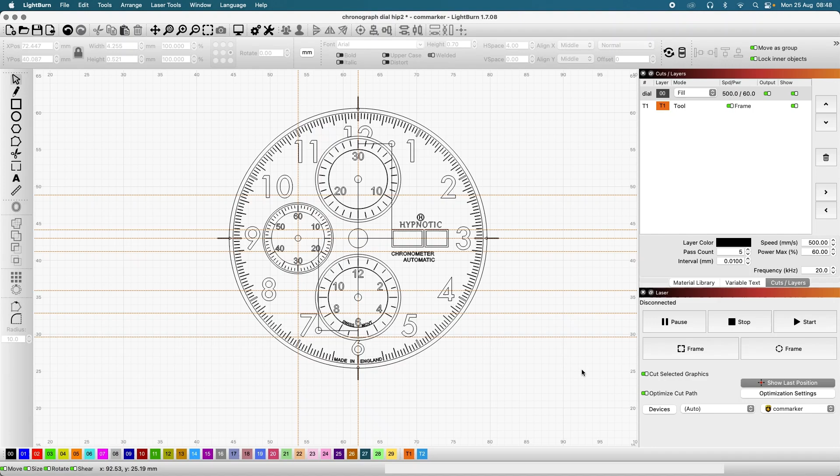Hello everyone and welcome back for part 2 of how you can make your own dial, your own chronograph dial. So in today's video I will show you how you can make your own design using LightBurn. There are many reasons why I'm using LightBurn, to be honest. I will explain to you why I'm using LightBurn exactly and why I'm not using Photoshop.

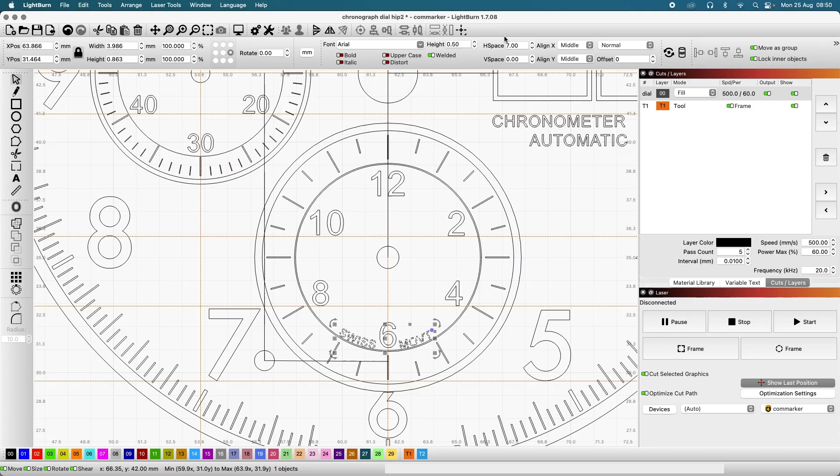So the thing with LightBurn, why I'm using this instead of Photoshop, is that first of all, everything that I'm doing, I can actually check on the piece of metal to see if everything is okay, if everything is in order. That's one. And second, I have more control of the writing. For example, I can see the size of the writing, the clarity of the writing, I can see everything. Another thing to keep in mind is, for example, you see the space in between them, you see everything.

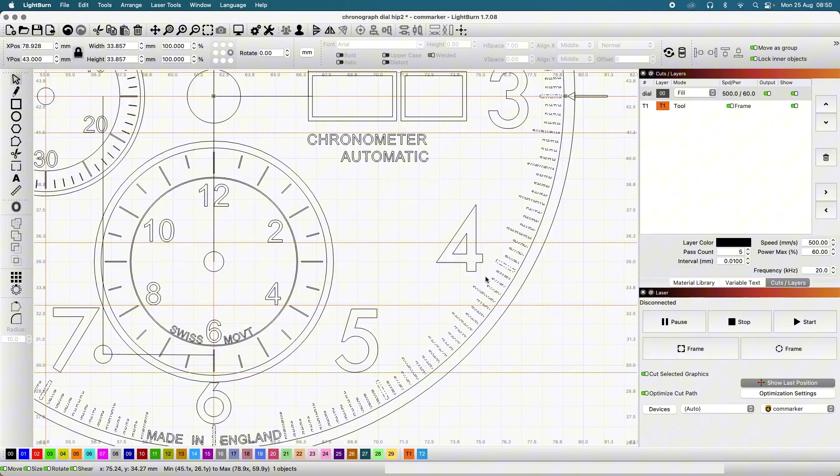So, for example, if you take a design from Photoshop, you do not know exactly the thickness of this cliche. You don't know exactly how big it will be, you don't know exactly if it will work and stuff like that. So that's one reason, and it is an important reason. Again, you can use anything that you want. It's really up to you guys. But I will show you exactly why I'm using a software that is made specially for the fiber laser.

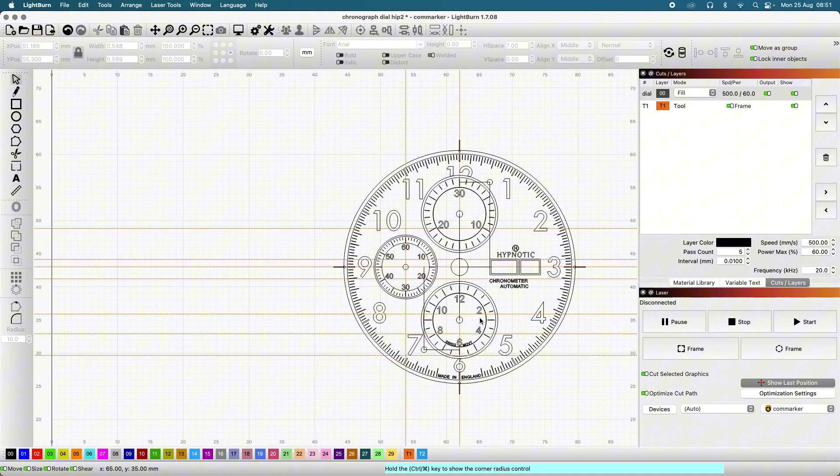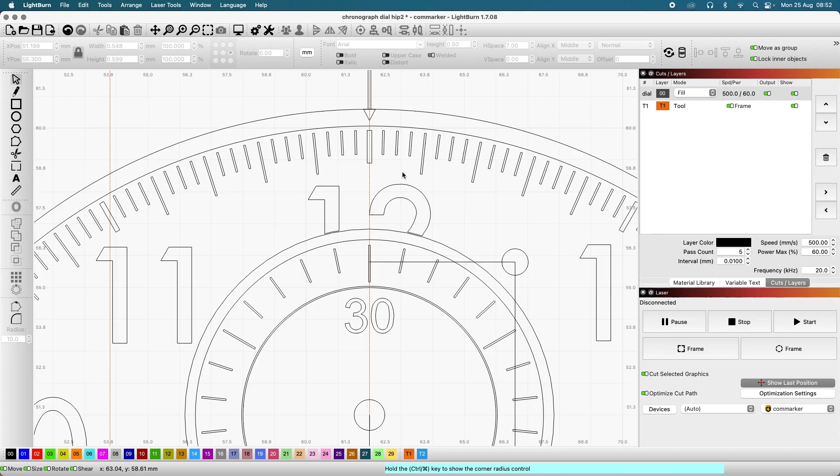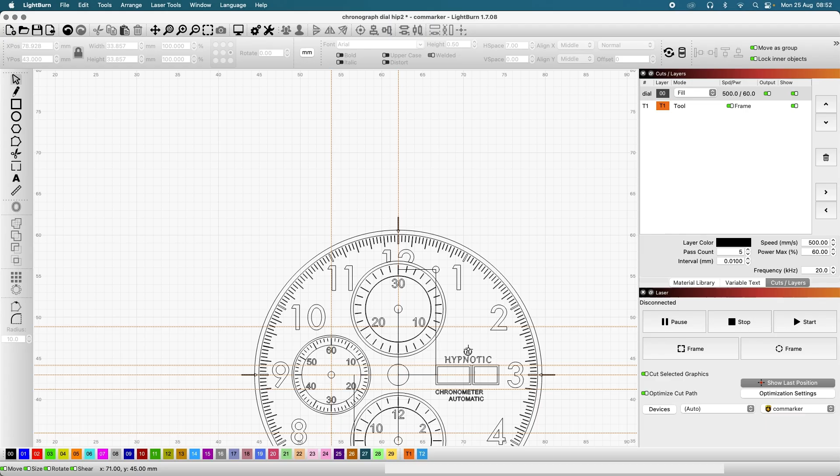So, like I said, probably there are many other softwares for making designs, but I will show you exactly why I'm using this one. Let's say you want to do split of a second, which again is the most important. The numbers, or anything else, you can actually do on Photoshop. That's not really a problem. But these tiny things matter to do on the software that you're using for the fiber laser. And I will show you how exactly you can do this split of a second, or how you can align them to be perfect the way I aligned them here.

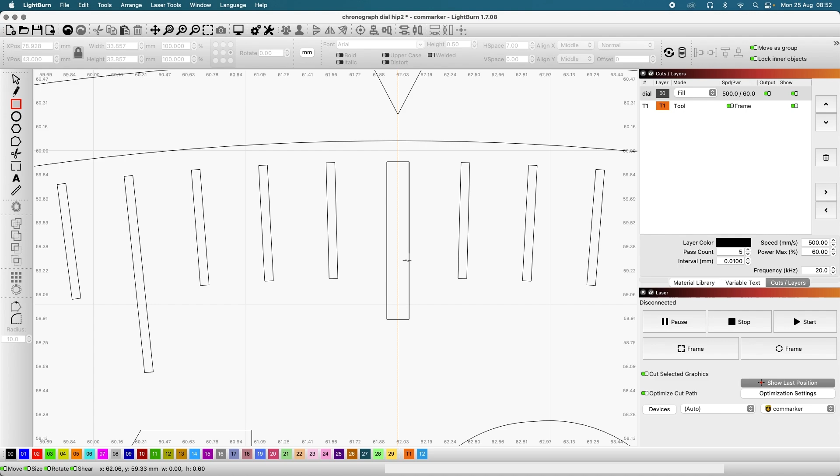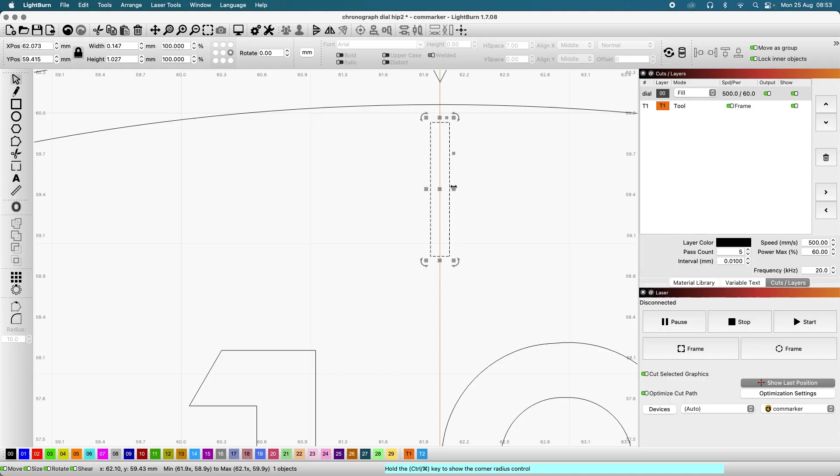So you take one of these, for example, and let's say you make it exactly like this. One second, let me take this one away from here, just for you guys to see. I'm just gonna put it here. Oh, I forgot one here. Anyway. So you have this, for example. Let me make it a bit slimmer, like this.

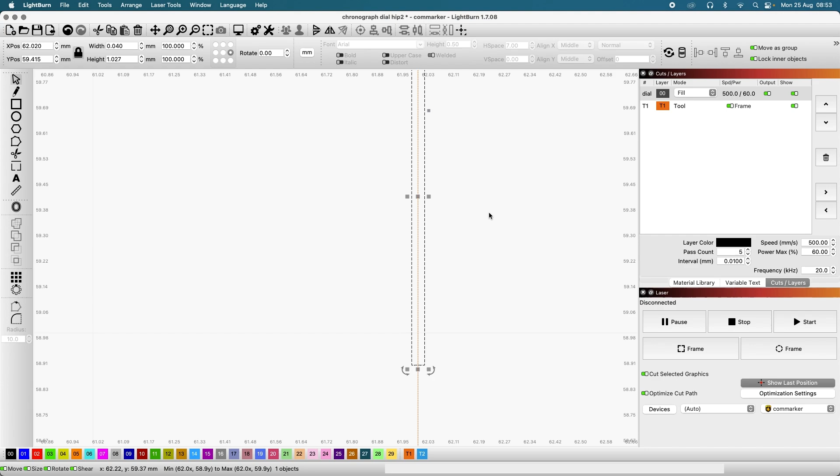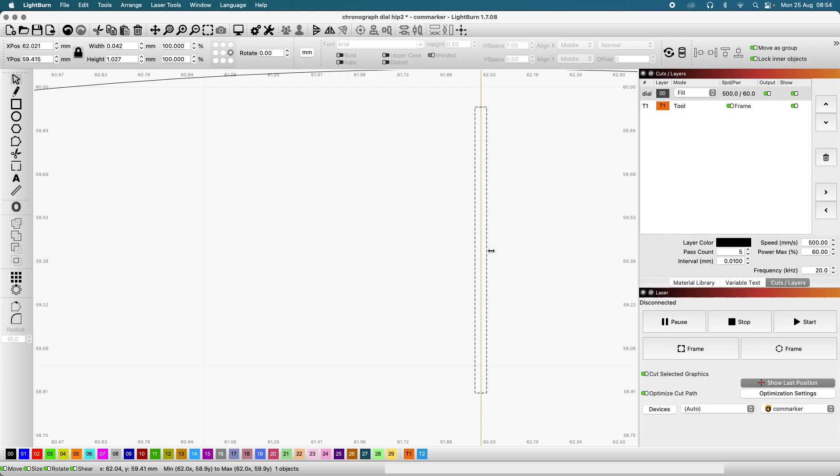If you do it very watery, you can actually do it even like this. But keep in mind, if you're doing this, as you see here, you have this one a bit thicker. So basically, if you're using it too watery, this one can go too thick. So ideal will be to do this separately. I will show you guys later what I mean. But anyway, let me show you exactly how to do this.

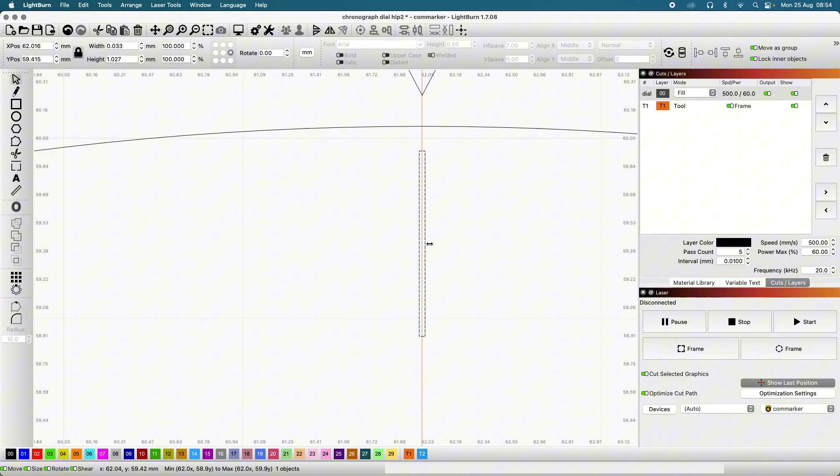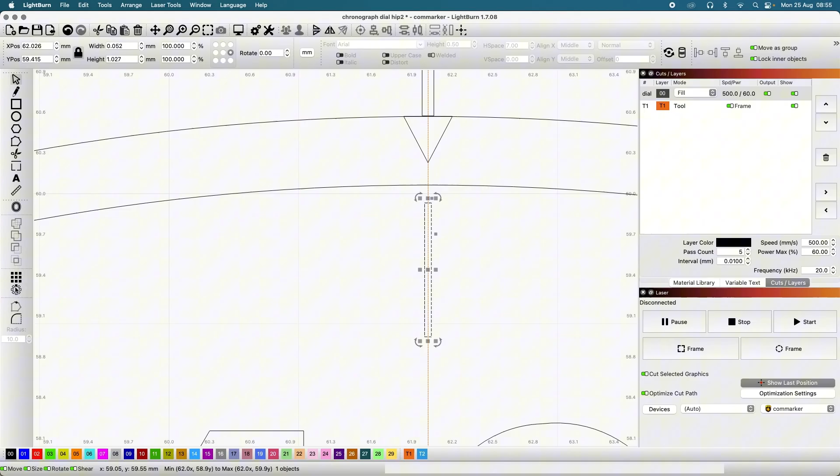Let's say you do it like that, and you want to spread it evenly across the dial, to go at 1, to go at 2, to go here in the middle, everything precise. And let's say you want to spread this one 12 times. So you go here, you put 12 basically. You start here from 0 because you just want to see exactly where the dial is centered.

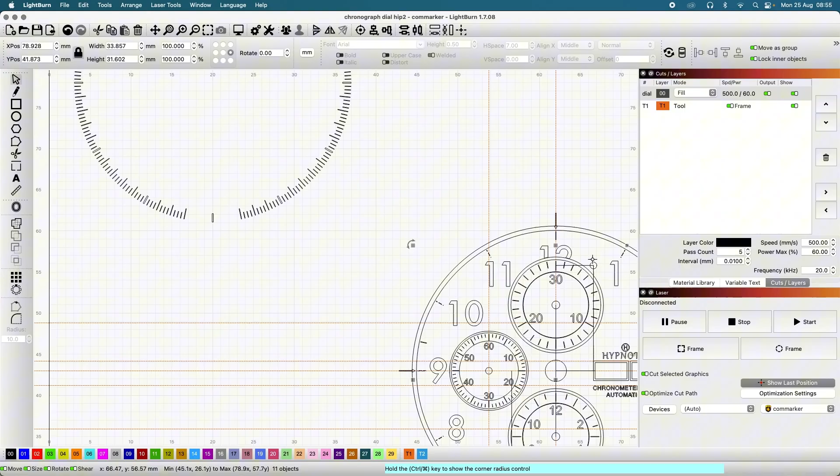So you go like this, and you see, you remember this 43 from now on, and you click OK. And as you see, it spread evenly, exactly the way it should be, basically. So that's why I'm using

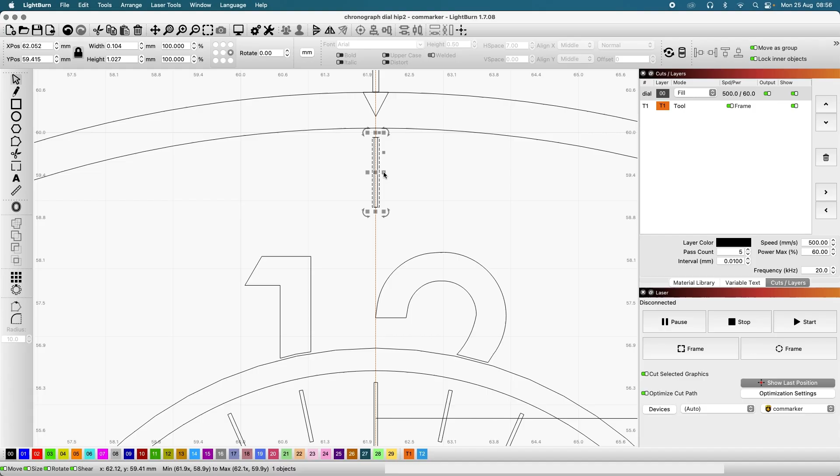LightBurn. So let's just say, for example, again, you take this one, you duplicate it, and you make it a bit. I should have done it the other way around, but anyway, this is just a video for you guys to see exactly how I'm doing the split of a second. Actually, let's go back a bit. Okay, let's do this one a bit bigger like this.

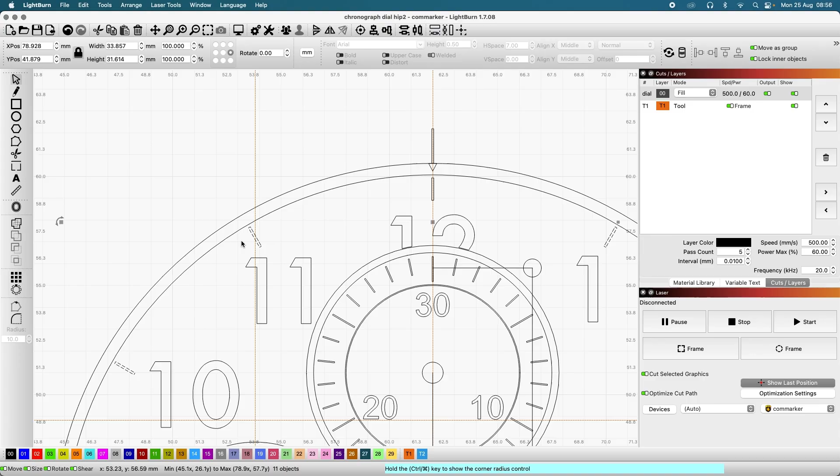You go back, you go 12, you go 43, you click OK. Don't forget to group every time after you do it. You do not want to take every single one of them individually, because it will take you forever. On this one it's only 12, but you will see later what I mean. Okay, so now I'm not going to duplicate them because I already have them. Anyway, I'm just showing you guys.

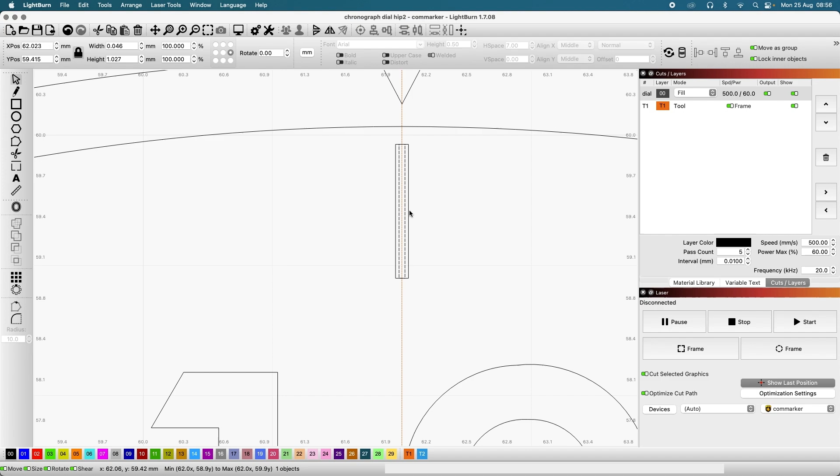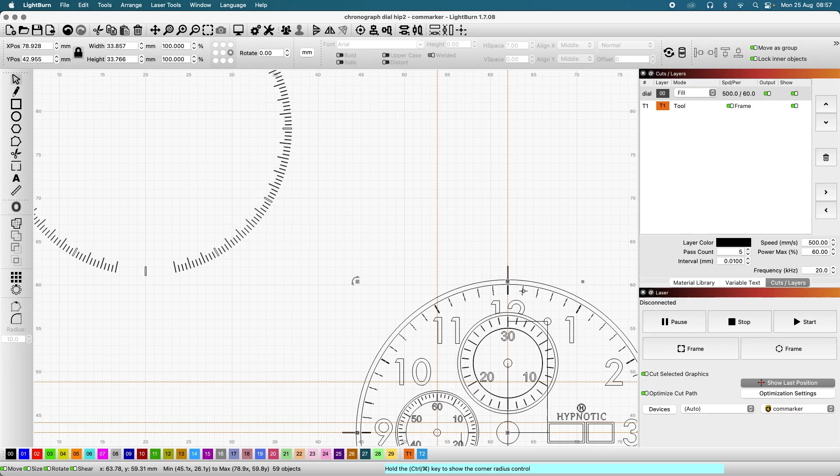And now you take this one again, make a duplicate of this one, and you make it a bit slimmer, like this. So basically, the thicker ones are for the hours, and these ones are for the minutes. And then you go again on this one, you go now 60, and again you go 43, and you click OK. And as you see, it made exactly 4 seconds in between.

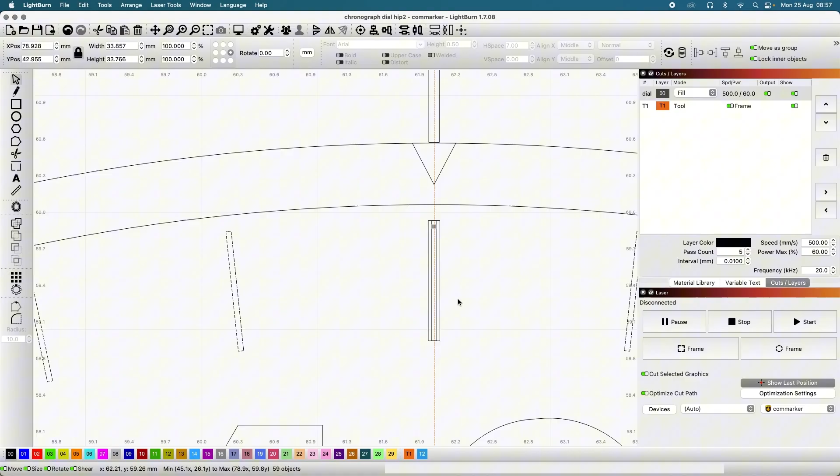As you see. And now, again, if you want to do the split of a second the way I did it, this one you group. Again, do not forget to group them, because it will be very difficult to take every single one of them individually if you forget to group them. And then again, you take this one, for example, you duplicate it, and let's just say you make it a bit longer just to see what you did.

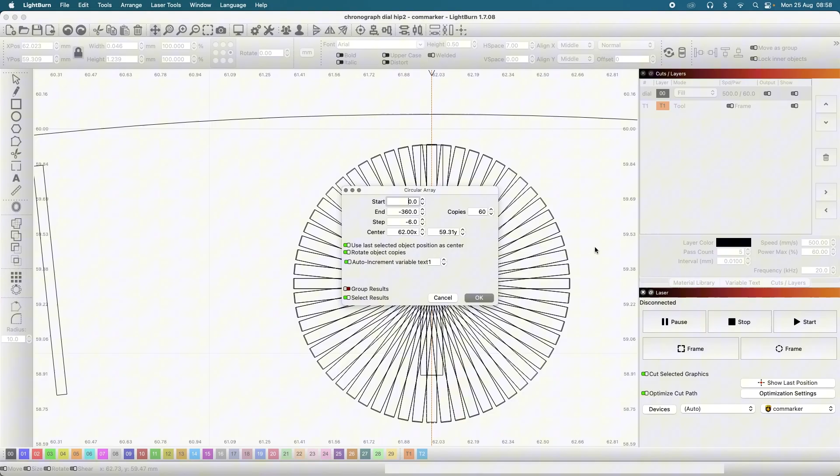And then you click this one again, but instead of 60 here, what you have to keep in mind when you do the split of a second, it depends on how many you want in the split of a second. So as you see here, it has 3 in between. The more you use, the harder it will be to do the pad printing.

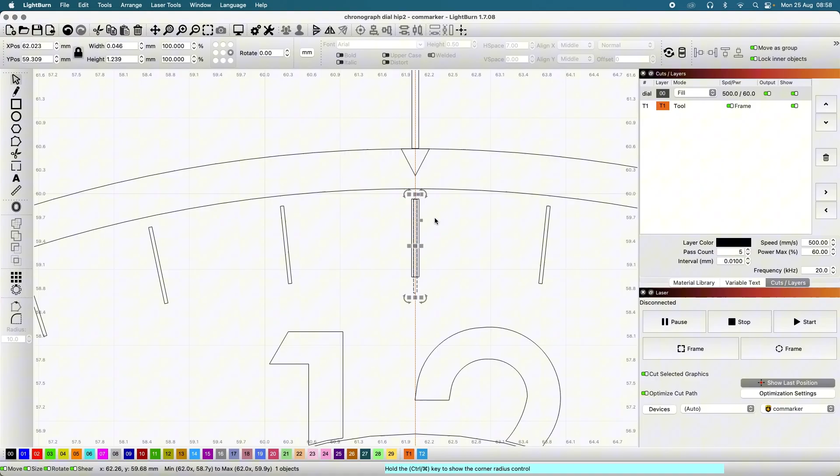You can use 4, you can use 3, you can even use 5, you can use however many you want, but keep in mind, because they are so tiny, when you do the pad print, every single one of them has to be properly clear and accurate, even with a magnifying glass. So I would recommend doing that when you're a bit more advanced at pad printing.

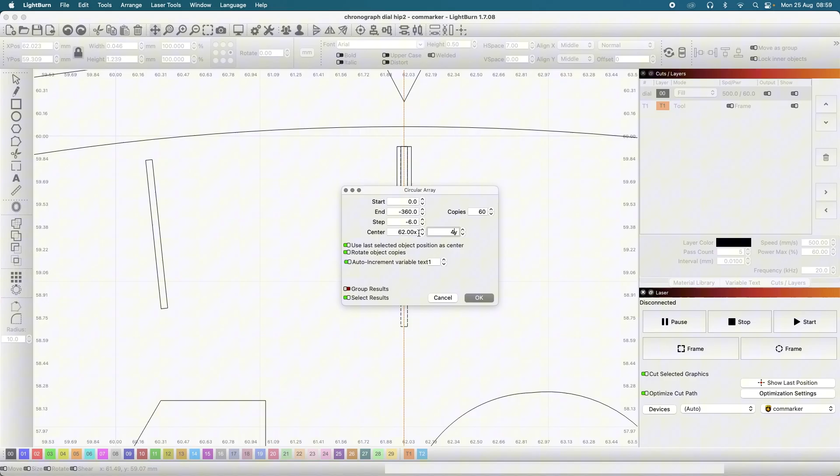Let's just say, for example, you want to do 3 in between, or you want to do 2 in between. So let's just say you do 2 in between. So you kind of have to multiply it. Basically, you have 60 now. You put, again, 43 it was. And instead of 60, you put 180. And as you see now, there are 2 in between.

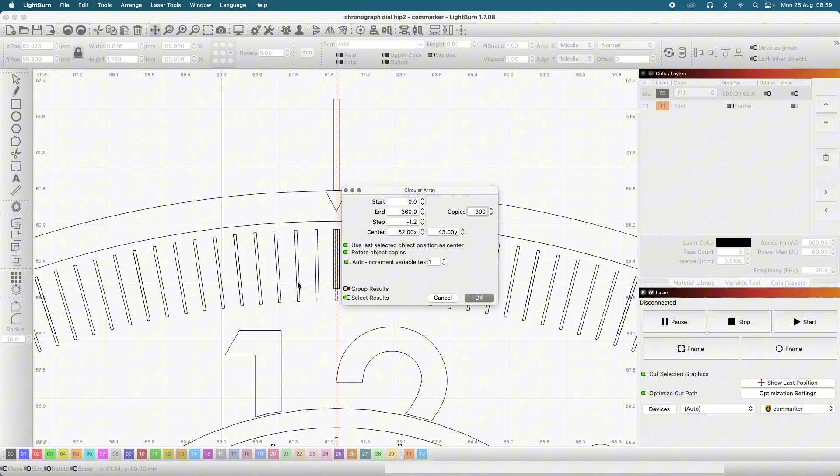You see, 1, 2. If you use 240, you have 3 in between. And if you put 300, you have to multiply by 60 basically. If you put 300, there you have it, you have 1, 2, 3, 4 in between. I would not recommend you guys put 300, because you have to do 300 of them. With the pad printing, you have to do them correctly. Every single one of them has to be proper and correct.

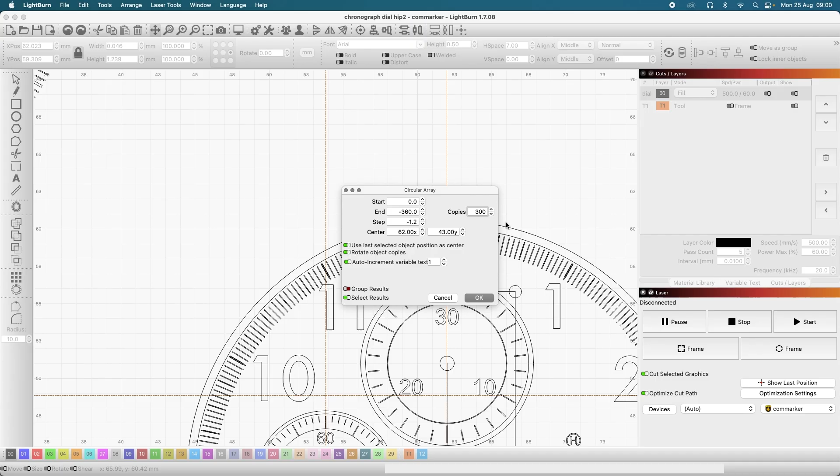I mean, it depends on your standards and how you want your watches to be, basically, but that's the reason why I'm using LightBurn. I just wanted to show you guys exactly how I do this split of a second thing, but it's actually very easy to do with LightBurn, the split of a second, or the seconds and stuff like that. And it works on every single one of them.

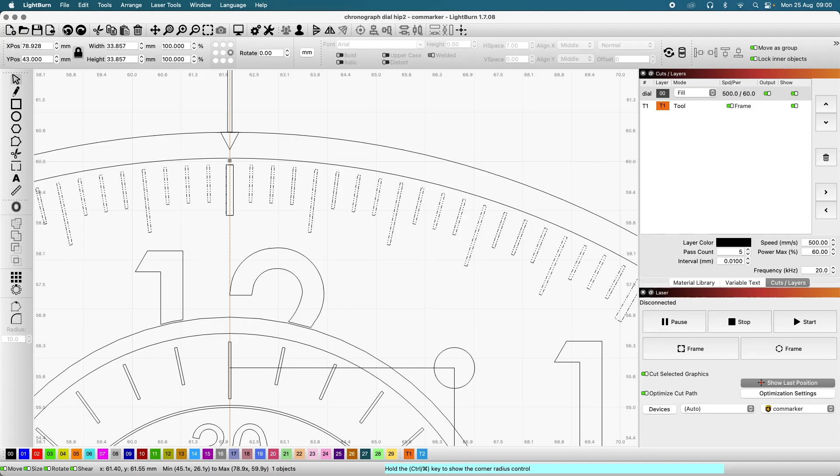Let me put everything together. I don't want to mess it up. I don't know if I saved it. One second to save this.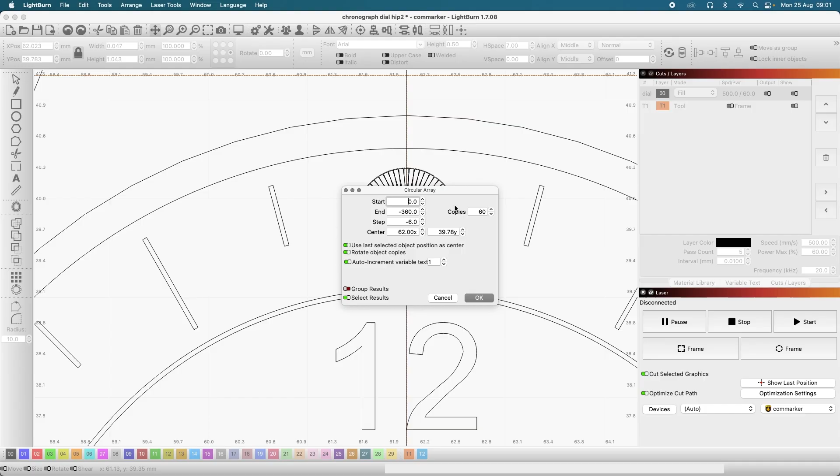And it works for these ones as well. You just have to find the center. Let's just say, for example, you take this one, and again you go here. Instead of 60, you have to count. Here you have 12, I think, if I'm not mistaken. 1, 2, 3, 4, 5, 6. Yeah, you have 12. So you put here 12, and here it's okay to start from 0.

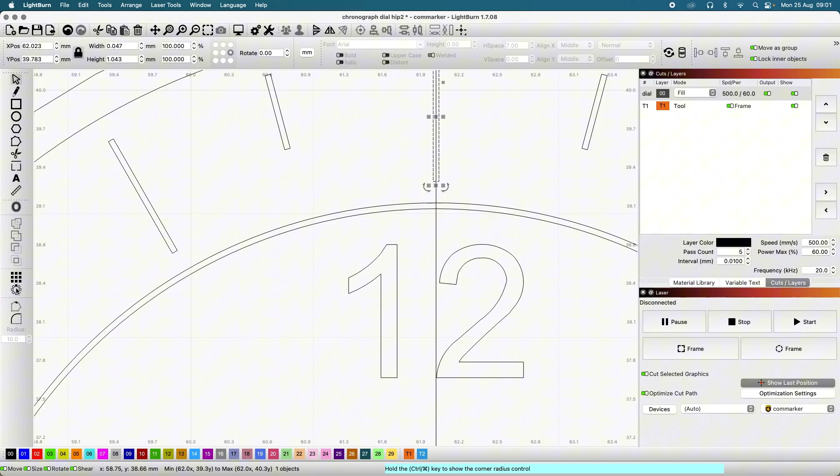Sorry, not like this. So you go like this, you put 12, and here it's okay to start like this, basically. And then you go down as you go, and you see it kind of goes.

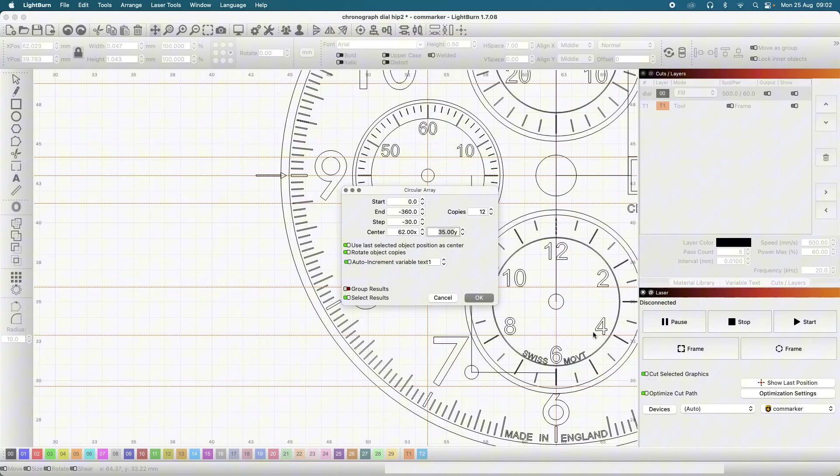So basically here is 35, because it's all about the center. Center here is 62, the other center was different, but it's exactly the same thing for this one. As you see, they went aligned perfectly. This is the way you do all of them, even here, even everywhere. This is the way you do the design.

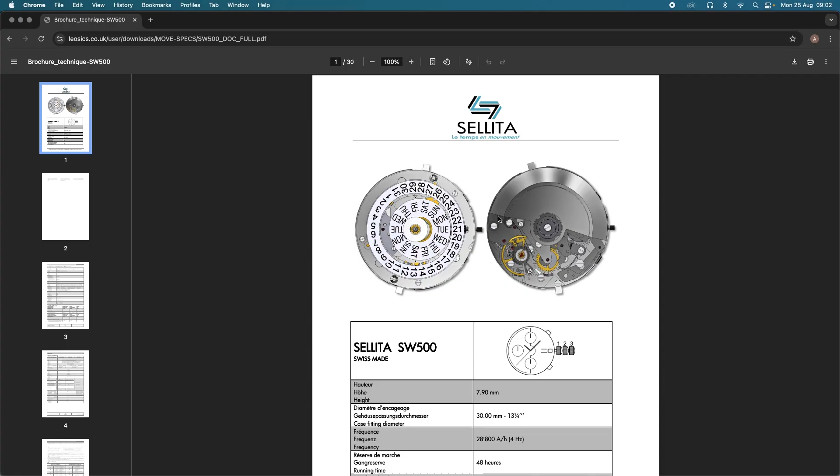Another thing you have to keep in mind when you do the design, all of this basically, all of these circles here, the date and everything. The way I do it, you go to Sellita, either the Sellita website, or you just find the manual for the Sellita that you're using. In this particular one, I'm using SW500, and you go all the way to the bottom.

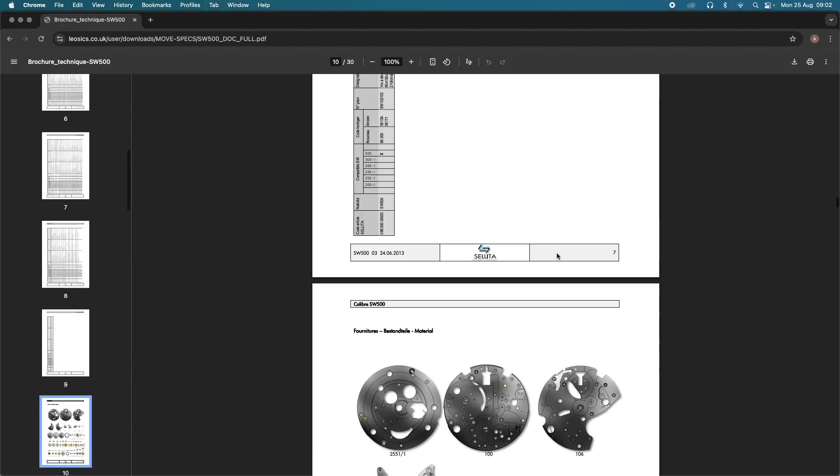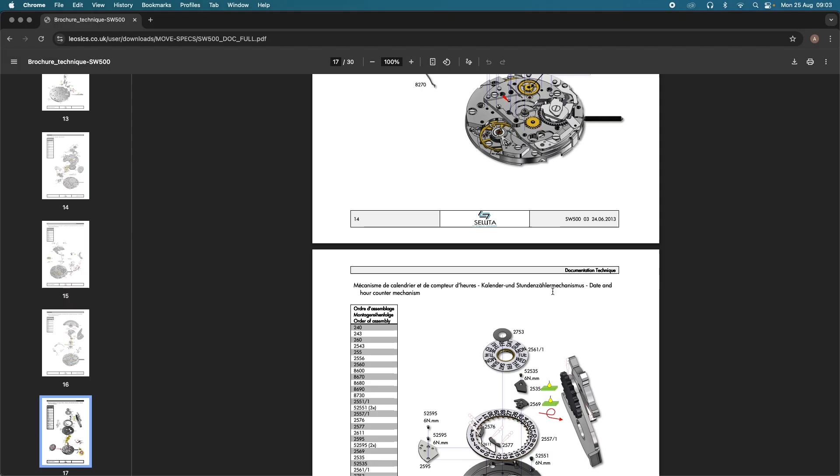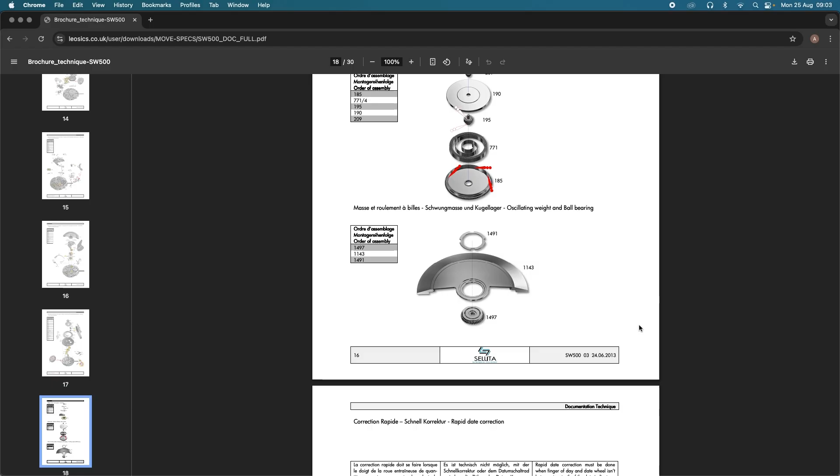Here's the manual you need in case you're doing a service. All the watchmakers have this. I think after a while you learn how to do this by yourself. I learned how to do my service on my watches, but not on these advanced watches. The complicated watches I don't do a service on, but on the normal watches, for example the SW200 or ETA 2824, I do the service.

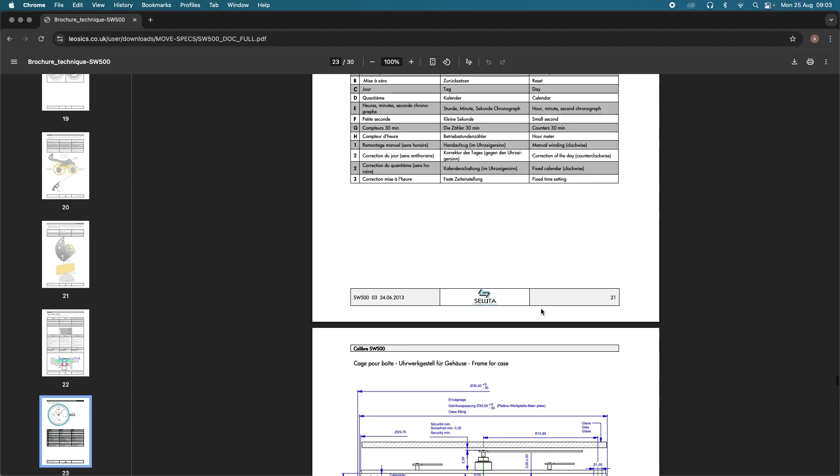I don't need this one anymore. Probably if you're a watchmaker you already know this, but you learn quickly. So all you have to do is go on this. This is the design. This is what you need if you start creating your own dial. This is the blueprint basically of the dial.

Keep in mind that ETA doesn't have this. ETA doesn't share all this information. They share how to make the service, where to oil it, how to put oil, and stuff like that. But keep in mind they do not share this blueprint, which is very important if you start making your own dials.

But what you can do, if you have an ETA movement, you can actually go on the Sellita website, because Sellita has exactly the same movements that ETA has. I do not know much about mechanical movements, and I do not know if you do a restoration of older movements, for example from the 70s or whatever. I do not know how old Sellita is, or if they have a copy of the older generation, but they do have a copy of most of the important movements.

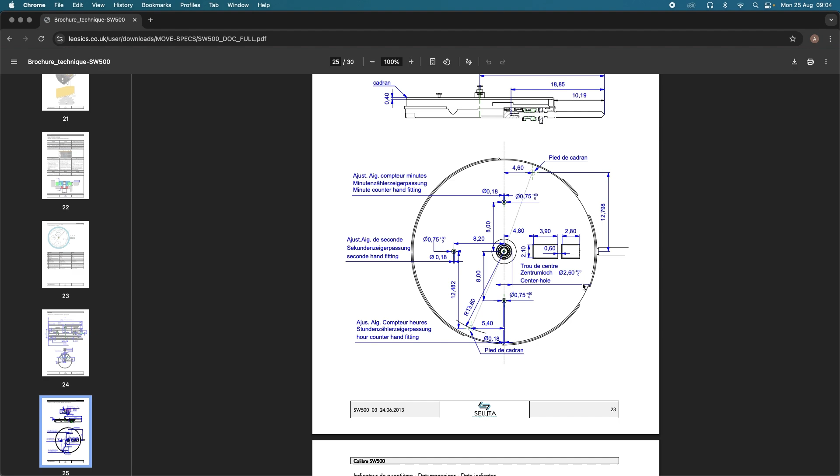So what you have to do is go on their website or find a manual and check this. Check all of these things, basically the way they are placed, and you see all of the measurements and everything. And then you go back to your design.

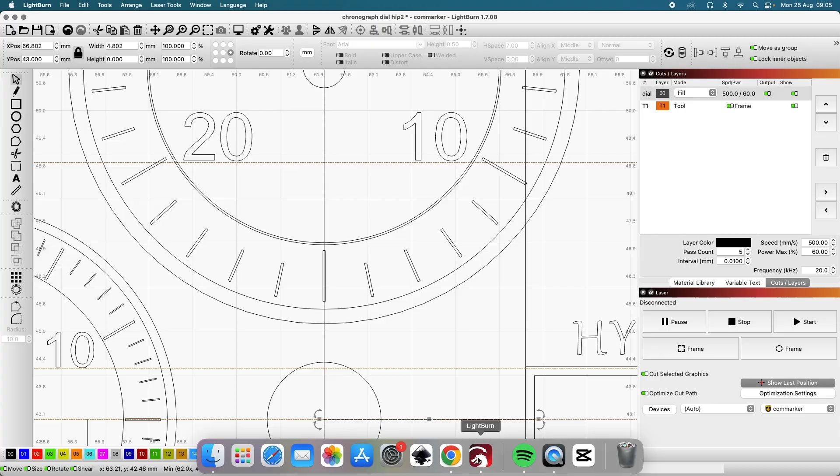As you see, all of these lines here are the dial feet. All of the lines are already measured. The date, the distance of the date, as you see here for example, is 4.8. You go back, you see the distance of the date is 4.8. So basically this is what you have to do.

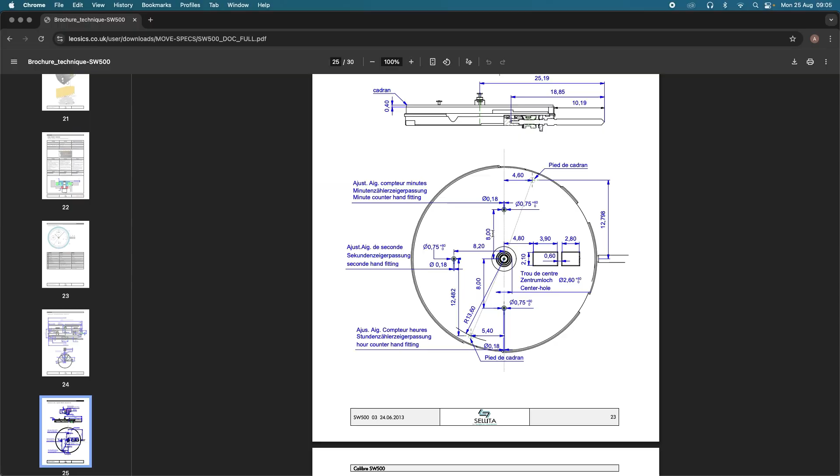Again, from the center all the way to the first hole here, you have to check. So basically the distance is 8 millimeters. Go back, you see this line here, everything has to go from the center. So you see this line here, all the way to the center, it's 8 millimeters.

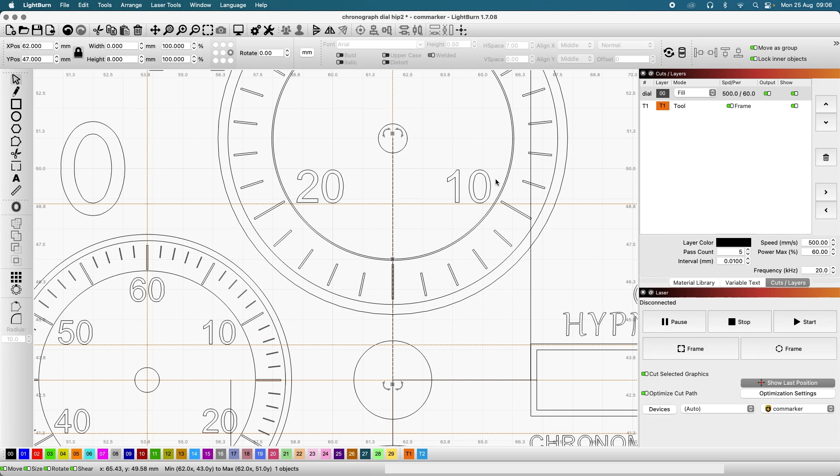So basically you have to take all the measurements. Everything that you see here in red has to be placed correctly. For example, this one is placed with this one. This has to be placed. Everything has to be exactly equal when you're planning to do a proper watch.

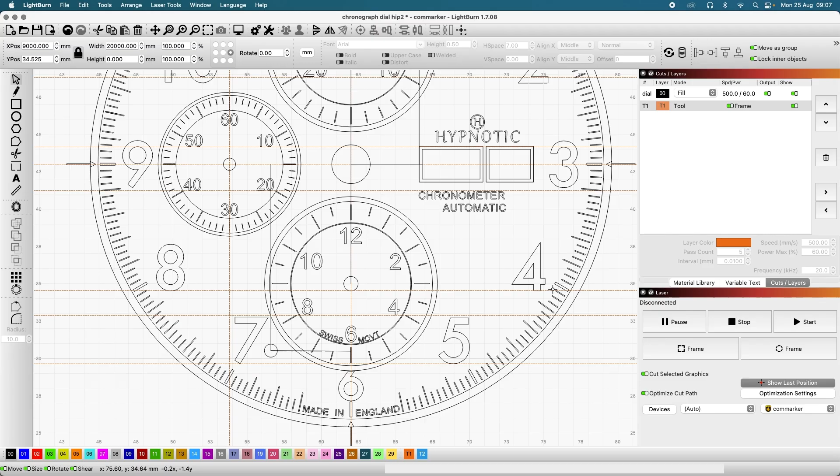Even this one, for example, was here, but I moved it. So as you see here, the 7 has to be aligned with the 5. This one was actually here before, but I moved it. Again, 4 has to be aligned with the 8. This one, they align by themselves.

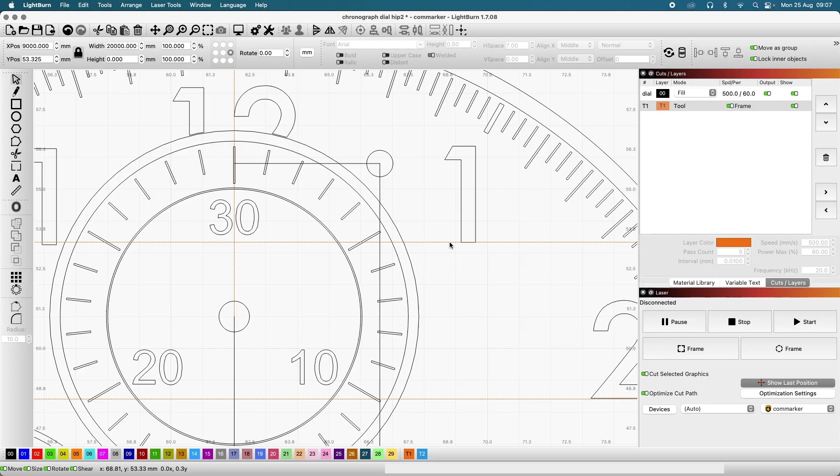Again, this one, the 2 has to be aligned with the 10. And 1 has to be aligned with 11, which it's not, but I will align it now.

Keep in mind when you do a watch dial and design everything yourself, everything has to be aligned the proper way. You can do the Franck Muller style where you just do the 4, or you can do it randomly. It's really up to you, but if you want to do a watch properly, you have to align them properly.

In this design, like I showed you before in the previous video, I'm doing a chronograph watch. I already have the dial for the chronograph, but this one I'm just doing for you guys to see how I do the split of a second, and for me to challenge myself a bit since this will be different. This one I'm doing with numbers, even though I don't usually wear watches with numbers, but I'll do it just to show you exactly how I do the pad printing of these numbers.

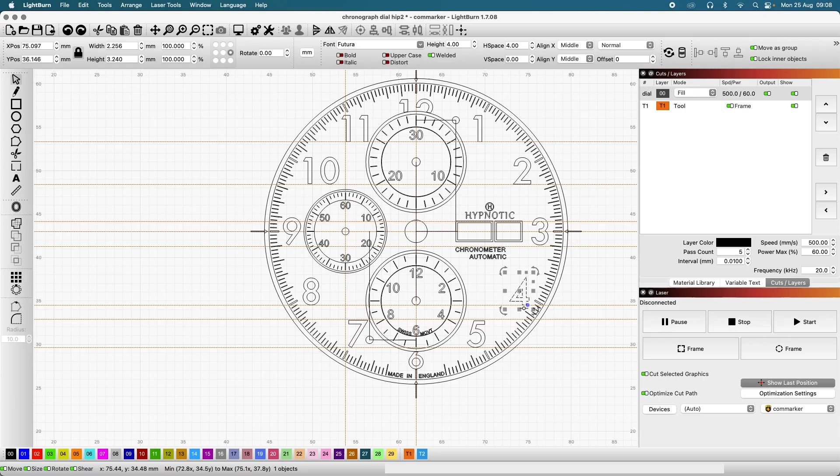With the 12, when you do a chronograph with the same type I have, with these tiny circles here, here and here, there are many types of chronographs. You have ones with only 2 circles, some with 3, but one is here and another here as well. Keep in mind these tiny circles take up most of the dial, so when you do the logo, you have to place it here, or if you have the other chronograph with circles here and here, you can put the logo on top.

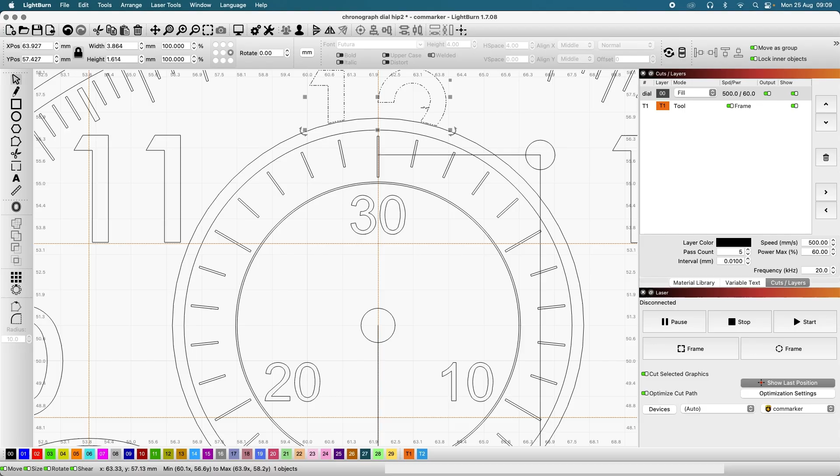But keep in mind that everything will be cut, basically like this 12 here and the 6 on the bottom, they will be cut. If you have a bit of knowledge of LightBurn, you know how to cut the 12. If not, you can use Photoshop and transfer it here. So like I said, I'm doing numbers now just to show you guys how I do the printing pad.

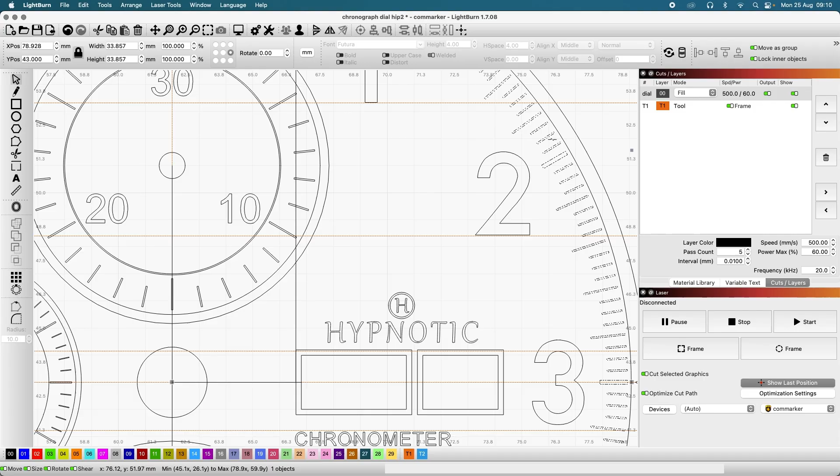What I'm planning to do on this particular watch, again because I want to challenge myself and because I'm experimenting with all sorts of things, is everything with sort of different colors. I've seen some chronograph watches that do this, only the hour printing pad. I'll do this with red or a different color, and the rest I'll do with a different color as well. You need to be very precise and everything has to be very accurate.

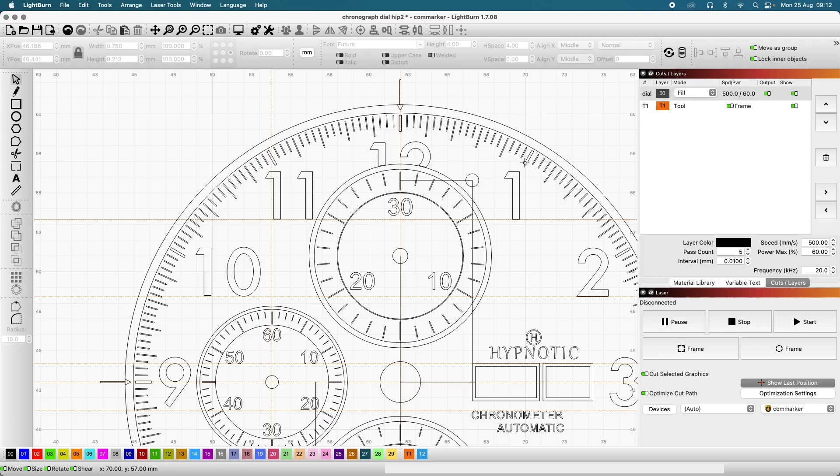So the way you do it is like this: do a cliche for this one separately, and do a cliche for this one separately as well. Basically print this one first, print all of them, then print the other ones exactly where they should be. Very hard to explain, but this is what I'm planning to do. I'll show you guys later when I do it.

When you do a chronograph dial, most importantly, most of them have to be done on separate cliches. This has to be on a separate cliche because they are very tiny, so the ink probably has to be a bit more watery, diluted more for these tiny ones. This one has to be on a different cliche, all the hours, because they're way bigger, so this ink has to be a bit thicker. It kind of depends on you, how you want it to look.

Ideally this one would be on a different cliche, every single one of them - this, for example, this and this. So ideally you'd have a smaller printing pad, a smaller silicone rubber pad, to do this one and this one and this one. I'll probably do that as well, just to show you how I do it.

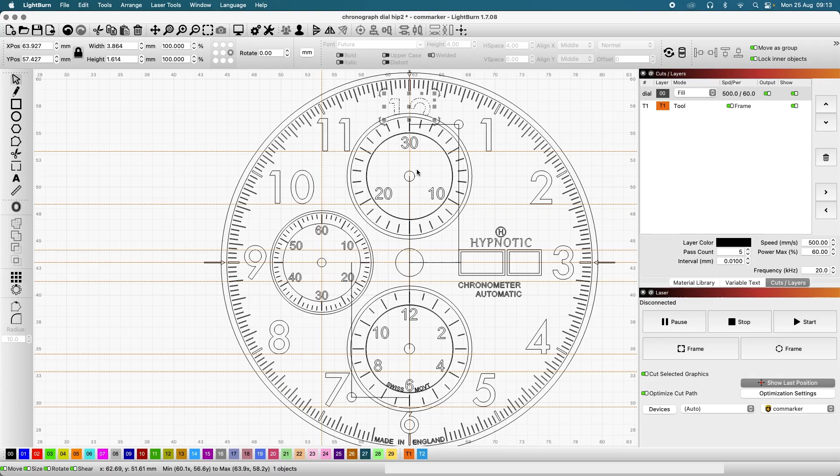I don't remember if I still have a smaller one - I had it, never used it though, but I think I have it somewhere, if I didn't throw it away. I got it from AliExpress and it was quite cheap anyway. I do have a smaller silicone pad anyway, so I'll show you guys how to do this one separately. Ideally you do it separately, don't try to do the whole thing in one go. I don't know if it will work - probably will, I'm not saying no, but I've seen some videos where this is the way they do it, separately.

What else? Again, the logo and this, if you're planning to write this, your logo and this one can actually go with this, or this can go with the numbers. It's not really a problem. It's really up to you how you choose to do it. I mean, it kind of depends.

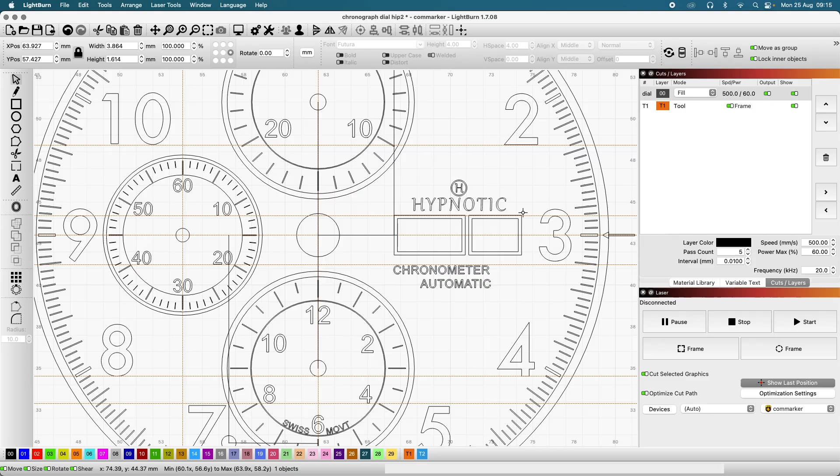If you want to do this again with a different color, you can use a different cliche for this one. So basically, keep in mind, if you're trying to do, for example, 12 red, 1 green, 2 yellow, or whatever, if you're planning to do all of them in multicolor, you have to use a cliche for this one, a cliche for this one, and so on. Every time you're doing this, you have to use different cliches. If you're planning to do a multicolor dial, you have to use different cliches, and you have to dilute your ink the same way for each one.

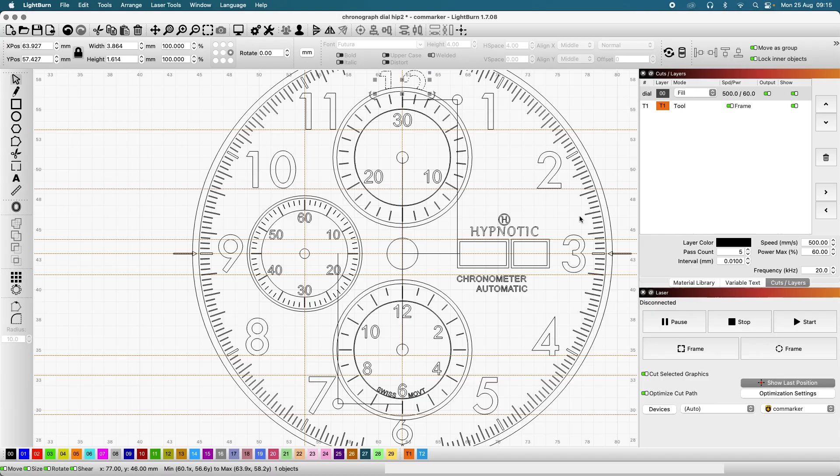So yeah, that will be a bit of a more advanced situation, but I will show you guys how I do this, how I stamp all of this and the way I stamp it. But so far this is the design I will be choosing. I will try to do these things as simple as possible, just for you guys to see.

I don't know if I will keep this dial, or probably I will. I will have to see how it goes, and if I manage to fit the dial, because I took another measurement now, so probably it will work this time. We'll have to see what I do with this one.

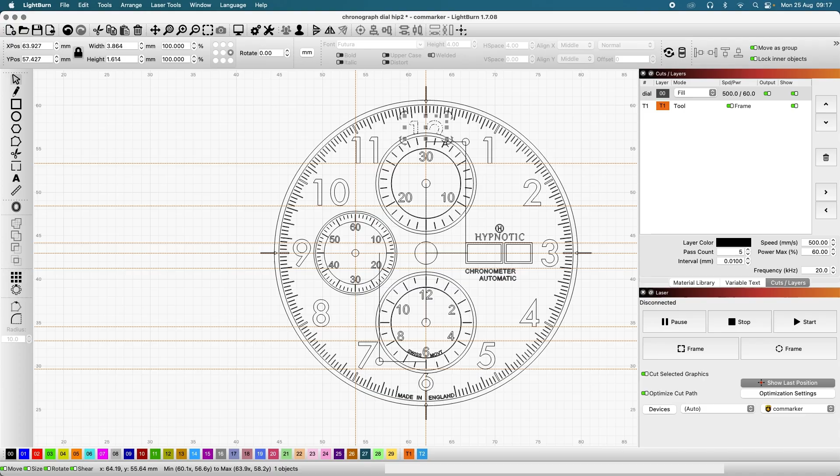So basically, the chronograph watches come in different colors or different things. You can choose to make these tiny circles here different colors, or you can leave them the same color. It's really up to you guys. If you're using a different color, that will be a bit of a challenge to paint. The way you can paint it is, again, the cliche thing. You can actually use it to paint the whole dial as well, or paint these tiny things as well.

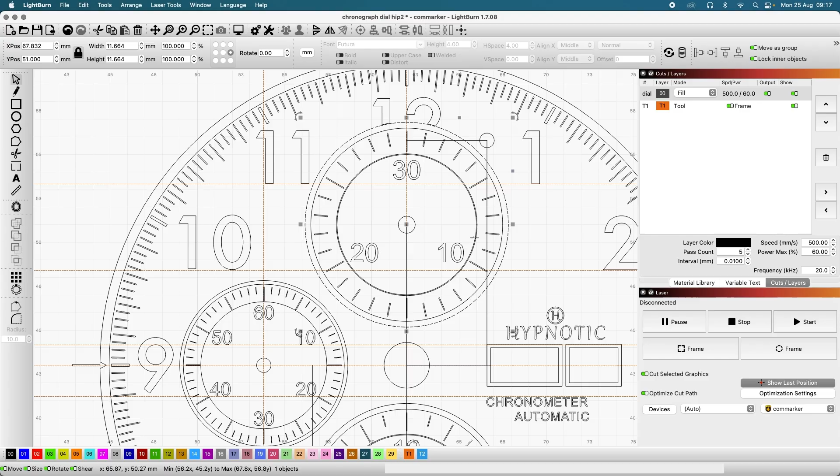So what you have to do is take this one, engrave it on the piece of metal, on the piece of the cliche I showed you before. You engrave it with exactly the same settings you used for engraving the ones I showed you before. And you can actually paint the whole thing by using the pad printing method. So keep in mind that you can do that as well.

Regarding all of this, if you have any questions about the design and everything, feel free to ask. You can leave a comment and I will try to answer you guys. But that's all there is to know about making your own design from scratch for a chronograph dial using LightBurn.

And again, you use LightBurn only if you use a fiber laser. If you're using a CNC machine or something else to cut the dial, then this doesn't really apply to you, only the cliche part does. But I'm using LightBurn because I have more control.

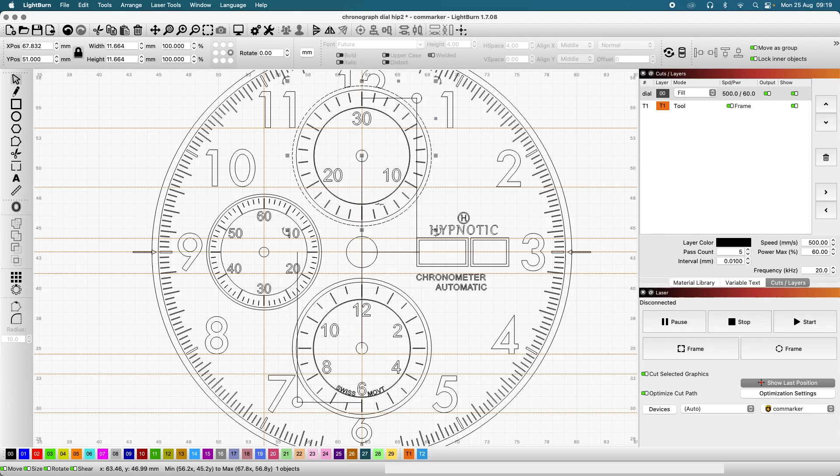For example, once this one is already designed, I can give it a test on those piece of aluminum business cards. I can engrave it, see how it looks, see if the writing is big enough, see if everything is big enough. Once I see that, and once I cut it to see if it fits and how it looks inside the watch, then I start the process of doing it. If you're using Photoshop, you don't really have control over this. You have to go back on Photoshop, edit some things, put it back here, do it again, and stuff like that. So that's the reason why I'm using LightBurn, and that for me is very helpful.